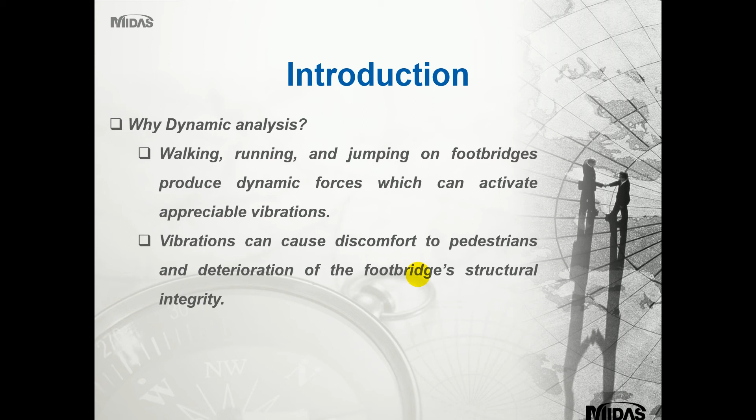So we're just going to look at the basis for dynamic analysis. From Newton's second law of motion, this time varying force equilibrium equation is derived, which is the fundamental theory behind dynamic analysis. Unlike static analysis, which is dependent on one parameter called stiffness, dynamic analysis involves a time varying force and consideration of three structural parameters: the structural mass, marked as M, the structural damping, C, and the stiffness, K. F is the time varying external force applied on the structure, and X(t) is the time varying displacement, as you can see from the equation. So the mass and stiffness are parameters which we are well aware of.

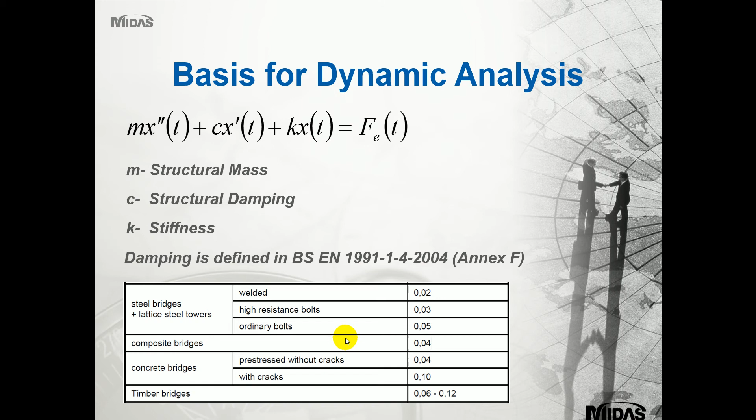The structural dampening effects and the amplification of the vibrations are also known. The Eurocode recommends some values of dampening coefficient for different types of bridges, which are represented in the table on the screen. Today we will deal with a composite steel girder footbridge, which we've got as 0.04 for the dampening effect.

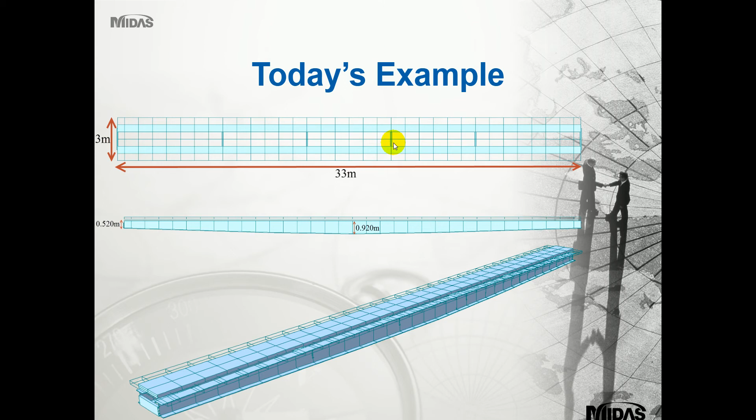So this is today's example. We are focused on a composite steel I-girder bridge for pedestrian live load only. The span of the bridge is 33 meters long, it is a simply supported single span, and the number of main girders is 2, spanning all the way across, with the cross members numbering 6. Just to represent those there, show you quickly.

Apply time forcing functions along the length of the bridge, maintaining constant pedestrian velocity. So the Eurocode load models are applied on the bridge with the code-specific constant velocity. That is for that section there.

The final step is to check for acceleration time response to determine the peak acceleration at any point on the bridge. The dynamic analysis in the software gives us the peak acceleration on the bridge, which can be compared with the code limit for comfort criteria.

Just to go over where the code comes from, the analysis will be done as per EN 1991-2, 2003 UK National Annex 2.44, which calls for 2 distinct analyses. We'll just go through those: determination of vertical deck acceleration, and a check for large synchronized lateral response.

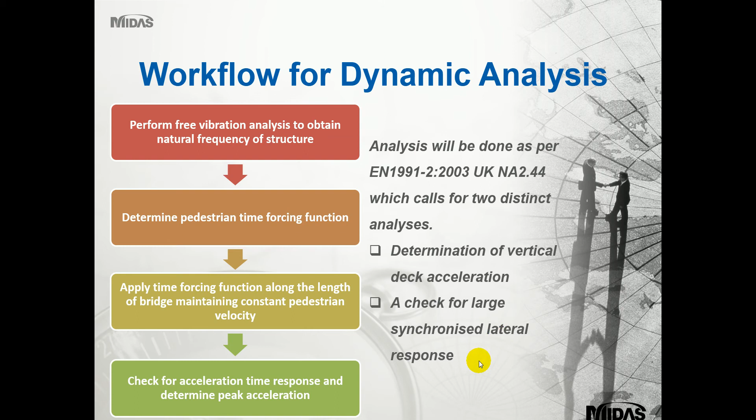This frequency is a function of just mass and stiffness of the bridge. This gives us an idea of how the bridge vibrates on its own and which vibration mode can be the worst for the bridge itself.

The Eurocode gives a verification criteria that should be followed after the analysis. A verification of the comfort criteria should be performed if the fundamental frequency of the deck is less than 5 Hz for the vertical vibration, which is in the Z direction, as we'll demonstrate during the use of the software for the vibration analysis. It's 2.5 Hz for horizontal, lateral, or torsional vibration, which is in the X or Y direction.

Now we're just going to go into the software. Just to drag the model across. So we have the Midas Civil working space.

First of all, I just want to tell you that we're not actually going to be modelling the composite bridge from scratch here, because we've already done that in a previous webinar. If you do want the recording for that previous webinar so you can model the composite bridge, then please do send us an email or give us a call and we'll send you the links. It's all on YouTube on our Midas UK page, so just to let you know that.

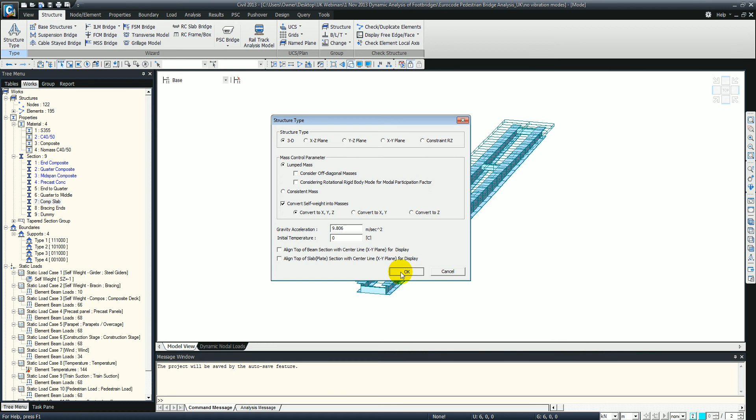But I'm just going to start this now and go straight into showing you defining the mass and converting the self-weight to mass, and also the other dead loads as well, using the structure type straight away.

When we convert the loads to masses, just go down to load to masses and do exactly the same thing. We could add different ones - for the precast, the parapets and the bridge deck, everything like that, and for all the services as well. So they've all been added to the structure.

So we've got to make sure we convert all the loads to masses, and the stiffness is taken into consideration because of the materials and also the sections, which are already defined.

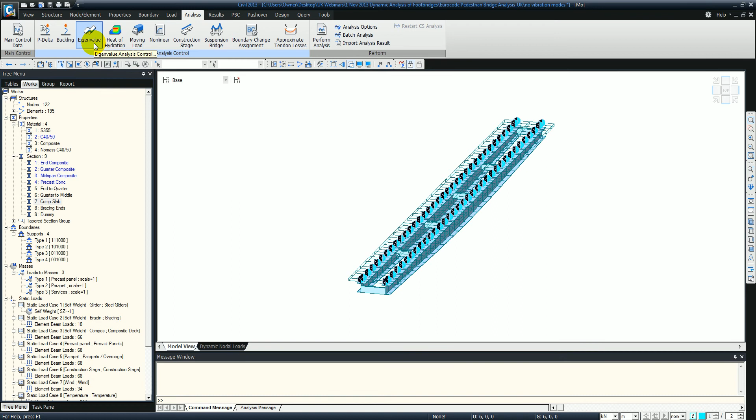So I'm just going to show you the free vibration analysis. Now we can change the number of frequencies, so we can change that to 5.

So now we've just completed all of this section. We're just going to bring the post-processing module over, where the analysis has already been carried out, since we didn't want to waste time on the analysis.

Now let's go through the mode shapes and the vibration mode shapes. We've got different modes, so obviously you've got 1 to 5 there, and we can put a legend on it, look at the contours, and we can even do an animation.

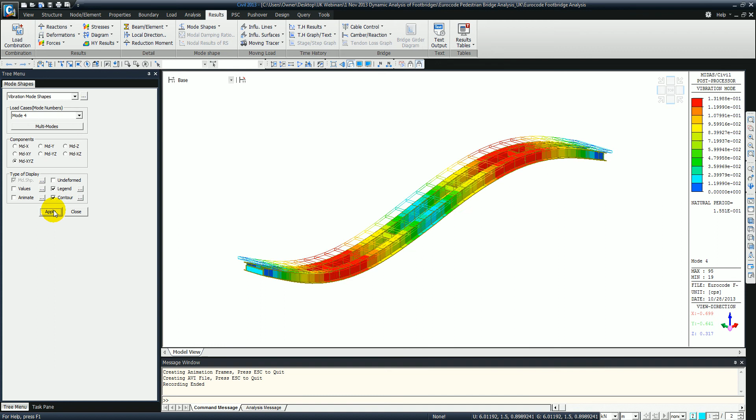So there's mode shape 1, showing it heaving, and here's mode shape 4. It's a completely different mode. We're just going to show you an animation now, and then we'll show you some of the tables as well. So that's an animation, that is one complete motion.

I'm just going to show you the table as well, just to show you how this actually compares up. Right, here we have all of them, so just to show you some of the columns. Now this is the cycles per second, so for every single second it will do 1.7 cycles, which is what I showed you before, so it iterates up and down 1.7 times.

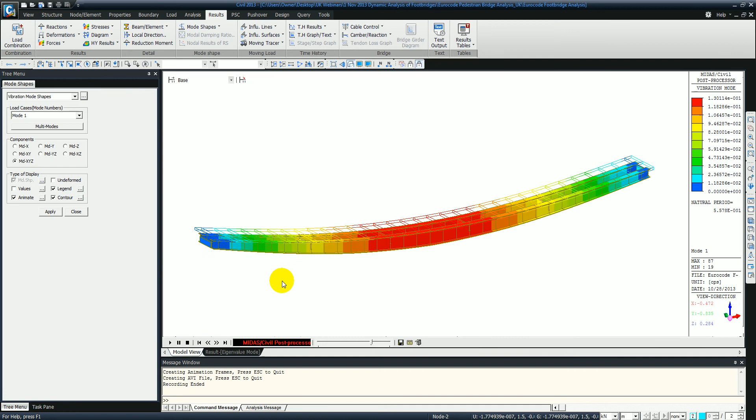So just to show you, this is one complete motion all the way to the very top. Let me press play again to find it. So all the way up to the top, then all the way back down, then back to the middle, and that is one complete cycle. It will do that 1.7 times every second. So let's just explain that for you.

So here we have the motion in different directions. You have the sum of the mass in the first mode, which is the movement, so anything over 90%. This shows what percentage of mass is participating by a given mode of vibration, and the mode with the highest mass participation is the critical mode of vibration. As you can see, for mode 1, which is over 90%, or 92.1% in the trans Z direction, or the Z direction, which we'll demonstrate in the model now.

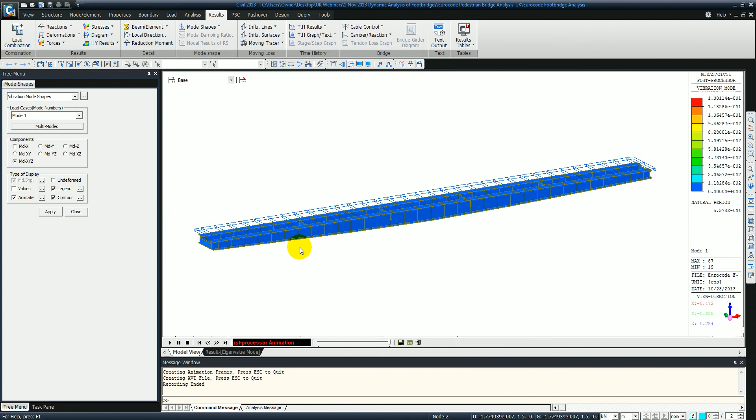So as you can see, this mode we've seen it previously, we just want to see it again. As you can see, it's actually heaving in the Z direction.

I just want to show you by taking it back to the table, and I just highlight in the Y direction, so you can see it's 77.2%. It's cumulative, so it actually adds it up with each iteration. So we see that the cumulative mode 1, 2 and 3 will eventually be over 90% if you add all the modes up in the Y direction. Just to show you the mode view in the Y direction for mode shape 3 - here's mode shape 3, as you can see, it's actually bending in the Y direction, it's actually twisting in the Y direction.

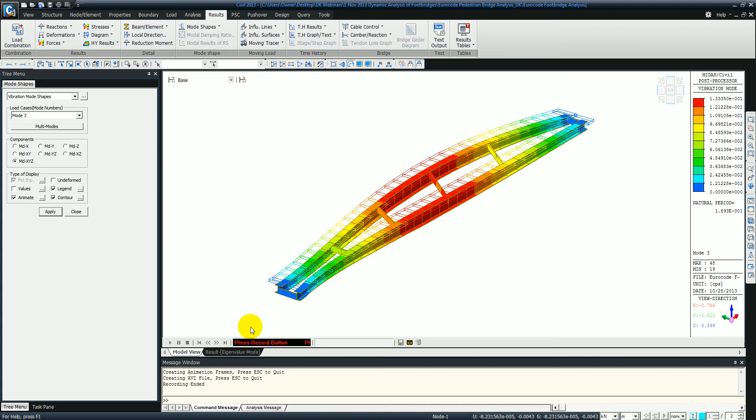So now you must be wondering why I've only decided upon 5 modes instead of say 6, 10 or even 15. This is because the code says that the total number of modes to be considered for vibration analysis is based on the sum total of the mass participation of all the modes, which is what I explained when you add them all up as you go along. So it should be no less than 90%, essentially. That's all you'll need to go up to.

So you can see from the table that 5 modes here are significant, sufficient to give 90% participation of mass in the Y and also in the Z direction. That's another key factor for both the Y and the Z. The mode with the highest mass participation is the critical mode, which is the first mode, is the most critical from the vertical vibration, i.e. 1.79 Hz. So as per the Eurocode, we need to check for dynamic analysis.

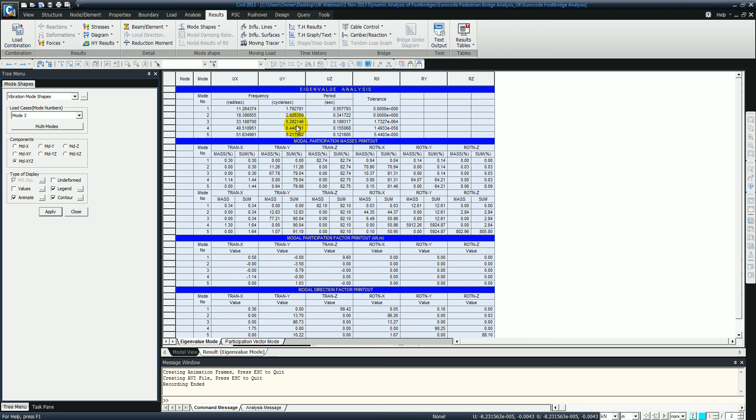So I'm just going to go back into the presentation, just load that up quickly now, so take you on to some animations. So that's the first mode, just showing you there, which is for the vibration natural frequency for vertical vibration is 1.79 Hz.

So a check is required. So the second mode of vibration natural frequency for lateral vibration, which is 2.93 Hz, the check will not be required.

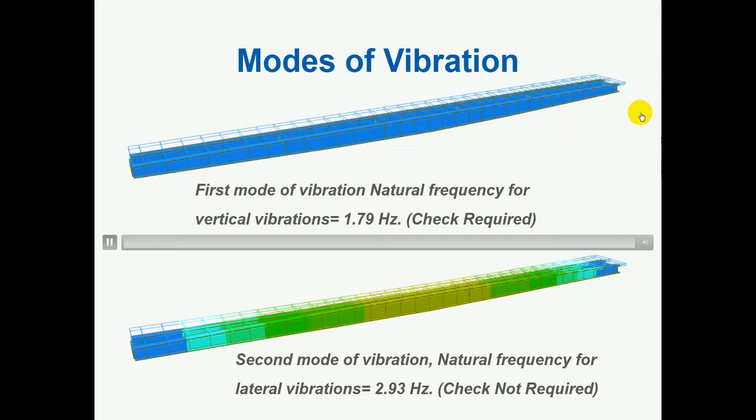So after doing the free vibration analysis, which we just carried out, we will see how to apply external dynamic loads onto the bridge. To consider external force effects, we need to select a number of modes of vibration for the analysis. These modes should have a combined mass participation of at least 90%, which is what we covered previously. So if it does not meet the 90% criteria, we have to run the free vibration analysis for more modes.

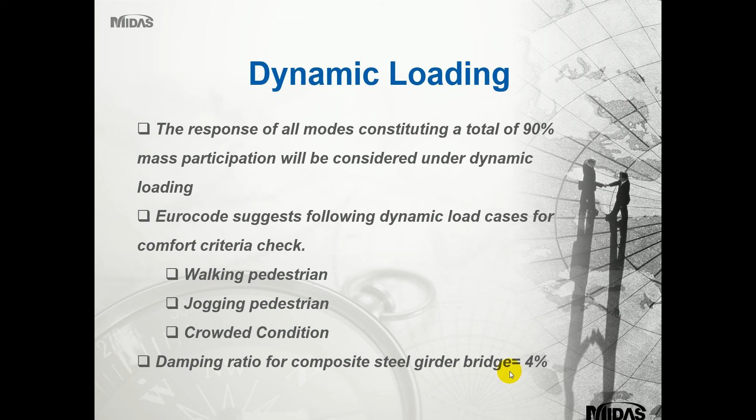So the Eurocode suggests following dynamic load cases for a comfort criteria check: the walking pedestrian, jogging pedestrian, and also the crowding conditions have to be considered, including the damping ratio for the composite steel girder bridge, which is set at 4%, which we showed you briefly at the start.

So for the dynamic models for pedestrian action, the first step is deciding the load model, which is selected for the class of the bridge, which has been nicely classified by Eurocode based on the type of usage of the bridge. Based on this class, Eurocode tells us what pedestrian densities should be considered in our loading. We will consider class B in today's example. So as you can see, n equals 4 for the group size and walking, and also the jogging is n1. Then we could also consider the crowd density, which is 0.4.

So just going past that point to focus on the bridge uses. We're talking about suburban locations likely to experience slight variations in pedestrian loading intensity on an occasional basis, so it might have crowd loading in a once in a blue moon kind of scenario.

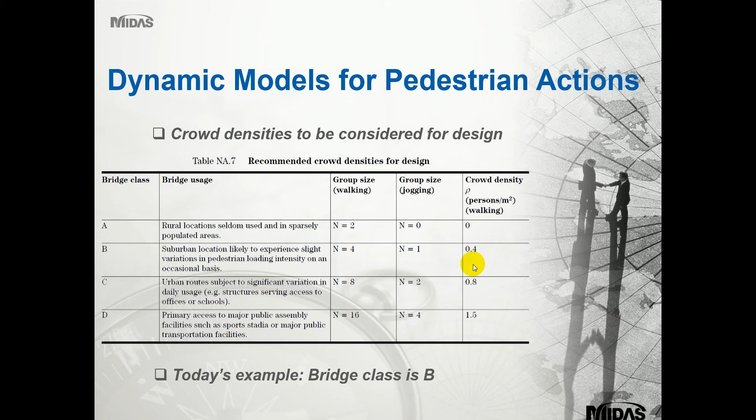So just going on to the next slide, talking about the walking and jogging actions. This equation is given by Eurocode for engineers to calculate the dynamic force to be applied on the bridge. The objective is to apply the worst case loading, and for that we need to get a resonance condition on the bridge, i.e. the frequency of the loading should equal the frequency of the free vibration on the bridge itself. We will obtain highly amplified acceleration vibration of the bridge, where the frequencies coincide and magnify the actual amplitude of the vibration itself.

So now we'll take you through the different parameters of this equation in the Eurocode. This code, as you can see in the table below, specifies unique walking and jogging velocities which need to be maintained during the analysis. As you can see from the table, the reference load, F0 or N, for walking is 280, and for jogging it's 910.

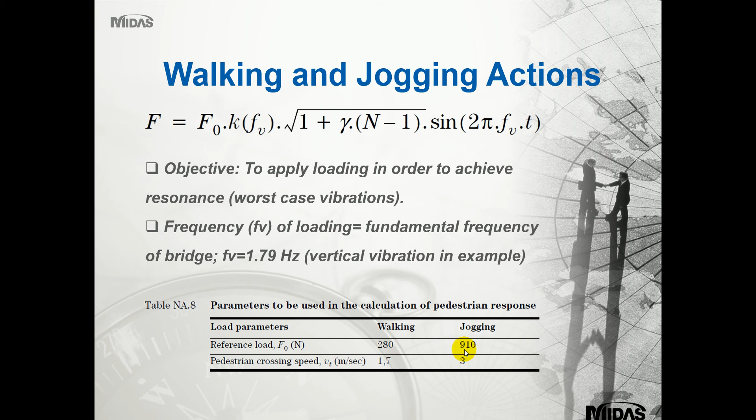So just to focus on the walking and jogging actions in a different equation here. The K factor is an extra factor applied to make this equation meet realistic population situations. This involves pedestrian sensitivities to vibration and harmonic responses.

As you can see from the curve, A is the walking, which is the solid line going throughout, and B is the jogging running, which is the dotted line. The x-axis is the frequency, and the y-axis is the combined population K factor.

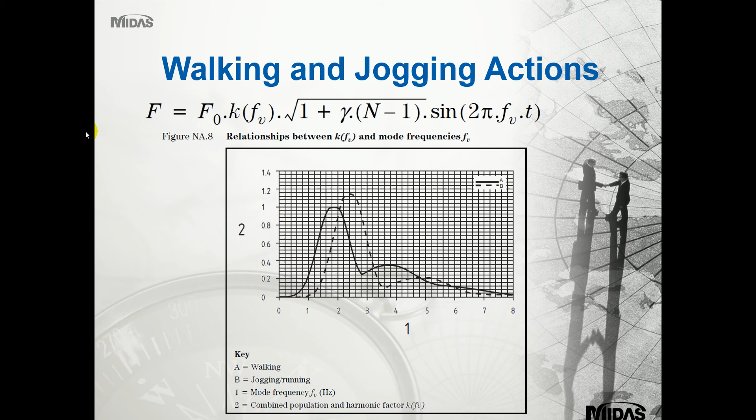So just going to go into the software and show the time history, load case, and the time functions. Now I'm just going to drag the software over from my other window across.

So I'm just going to focus on the time history load cases. I'm going to go up to load and load cases, then we just want to add a new one. I'm just going to add the load case, give it a name, which is walking, and just do the linear analysis, and also the modal as well for the analysis method.

And then we're just going to change the end time, which is 20 seconds. This is the length of time it takes to go from one end of the bridge to the other. The bridge is 33 meters long, the pace or iteration is 1.7 meters per second, so it's going to take about 20 seconds to get from one end of the bridge to the other. Basically, I think it's actually 18 point something seconds, but we're just going to stick 20 in for now.

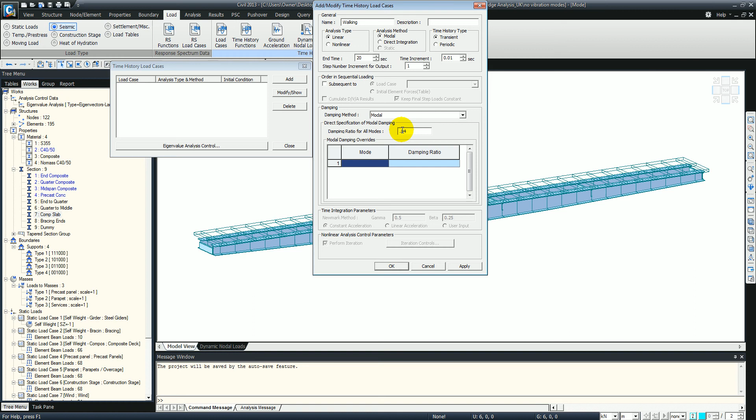So it's going to change the dampening ratio, which we discussed earlier, which is 0.04 or 4%. And we just click OK. So now we continue, and similarly to this, you can create cases for jogging and also crowd loading. We're just going to stick with the walking in this scenario, but really for jogging and crowd loading, you just increase the amplification.

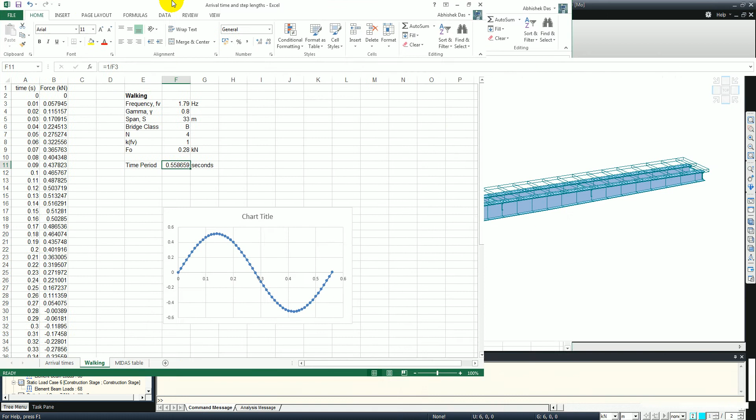So I'm just going to pull up my Excel sheet and show you actually the functions worked out. As you see there, per seconds of time, the force changes. This is the exact calculation that we had on the spreadsheet. As you can see, there's the force being produced as the time increases as well, and this is the forcing function going across there, the graph.

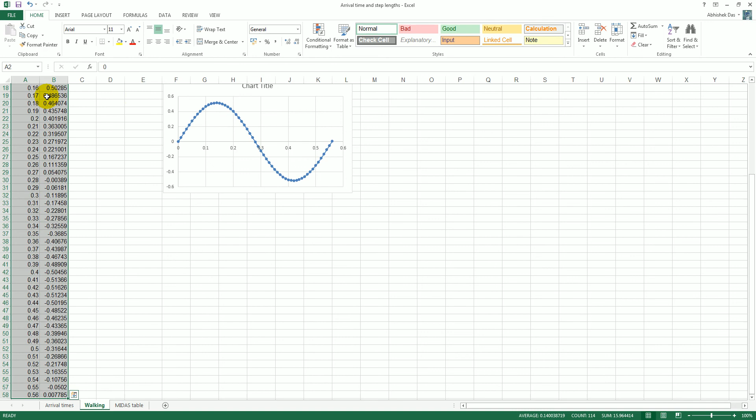So this one cycle takes 0.55 seconds, apologies there. So that's one iteration, and there's the time and also the force. Now what we can do, we can copy and paste this, select all and just copy and paste this straight into Midas. We'll create a separate worksheet.

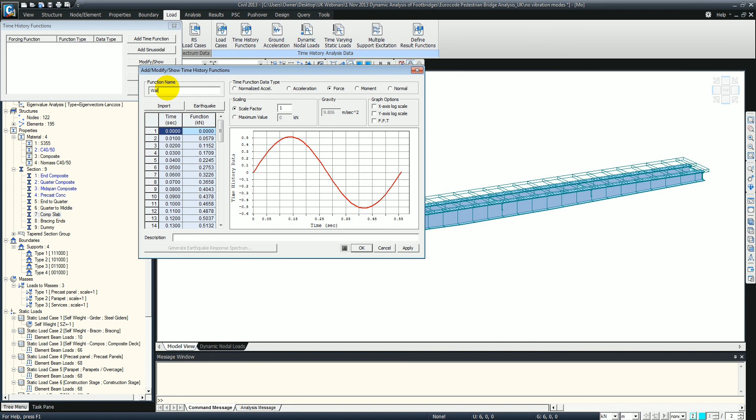So to show you the table now, we just go find it. Time history force function, just want to add it. You see there, we want to change it to a force instead of the acceleration. Then we can copy and paste the time and the function in there, and it also gives you your graphical representation. So we just call it walking. Click OK, just close that.

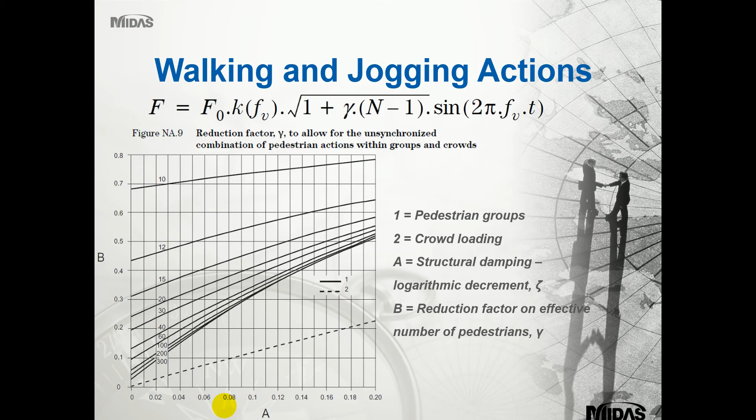So I'm just going to go back into the presentation now we've discussed that. We're just going to go through how to apply these actions.

The load application points have to be decided and marked on the bridge, so we put the nodal points where the pedestrian is most expected to step onto the bridge. The spacing of the points is such that the constant velocity of the pedestrian, as suggested by the code, is maintained on the bridge, making sure the bridge is split into equal sections. This is done using simple multiplication of velocity and the time period of one step of the pedestrian.

The dynamic force from the previous slides should be applied on these marked nodes, and they should be applied at different time intervals, marking the acceleration of the person going across the bridge.

I've already calculated these in an Excel sheet, showing the intervals going across the bridge. Here you can see the different nodal points, the number of seconds it takes to get across the bridge from one side to the other - the arrival time - and also the scale factors, which are -1.

Now I'm just going to bring over the model, and we're going to apply these loads into the table form. We look at the dynamic nodal loads, and we have to create them first and foremost.

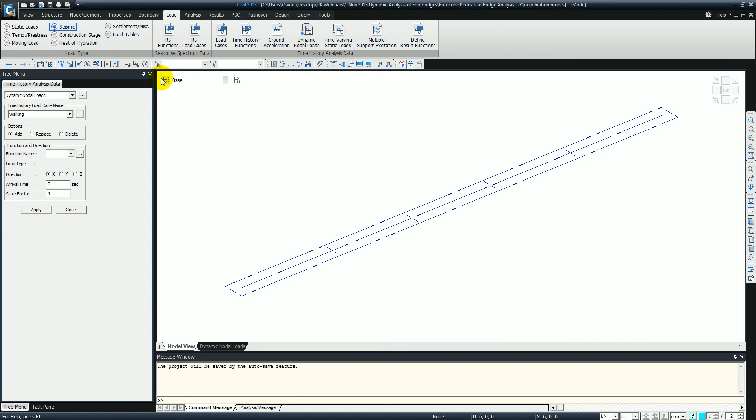We're just going to select the node at the first point, highlight everything, and create a function for the dynamic nodal load. There's one function that's been created, or it's already existing, and we're going to use that function, putting it in the Z direction with the scale factor of -1, which we had earlier.

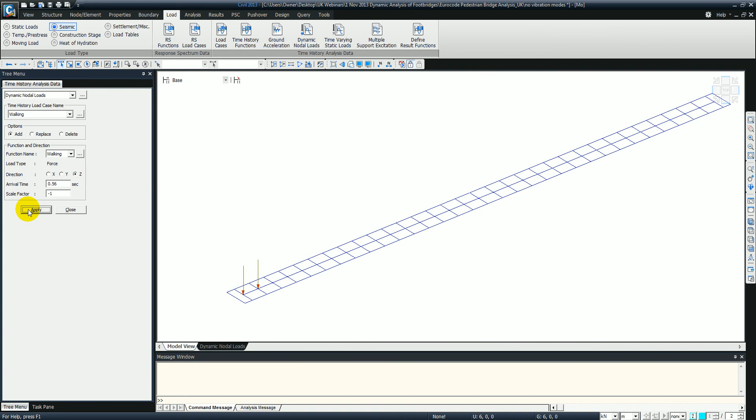I'm going to demonstrate this one more time, and then we'll use copy and paste to bring it in. We put in the number of seconds of the arrival time, then highlight the second node, which tells us how long it takes to get from one node to the other - 0.56 seconds. Now we can pull up the table and copy and paste our Excel sheet into this table.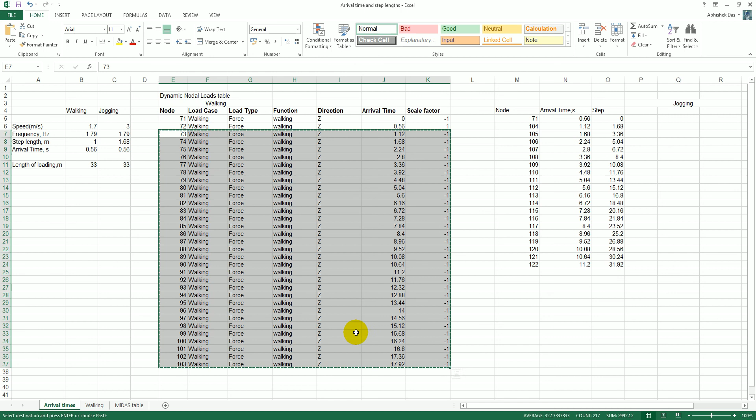I just want to select from the two at the top down, since we've already got those in there, and copy and paste those in. Now you can see the dynamic loads are already applied, going across the structure.

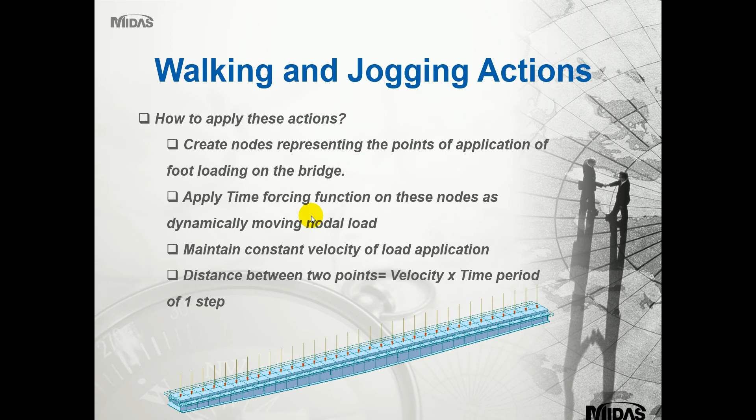Now we're just going to go back into the presentation and move on to the next section, focusing on the crowded conditions. Obviously these are slightly different - this is the crowd load model defined by the Eurocode.

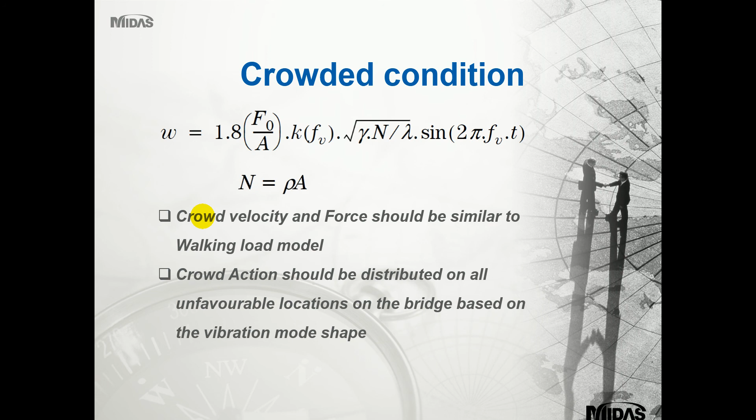The velocity should be the same as the walking velocity, and the crowd loading should be applied at the same time on the entire bridge. The direction of the force should be decided based on the most critical vibration mode shape.

So here we have the pedestrian vibration. We just run the analysis to see the vibration results, and these are the vibration results on the bridge structure.

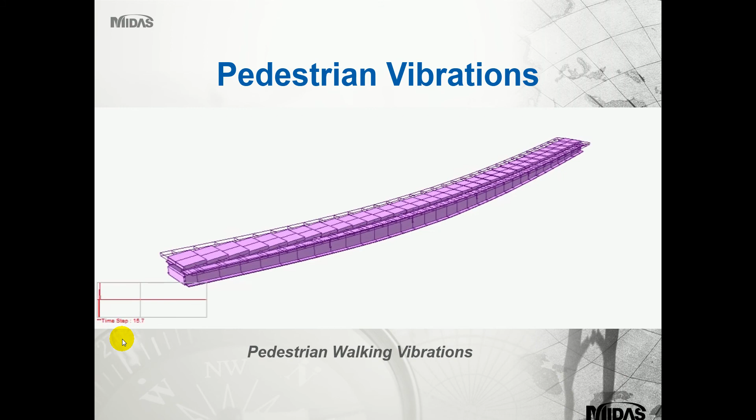The time history results for displacement are shown for each time step, and also the maximum and minimum displacement and acceleration results from the different load cases, which I'll show you now.

Now I'm going to take you back into the model view. There we go, we just look at the model view, and I'll look at some of the minimum and maximum displacements first of all.

So different - we can select the max for the walking, and we can select some of the different values. We just want to look at the acceleration and click apply.

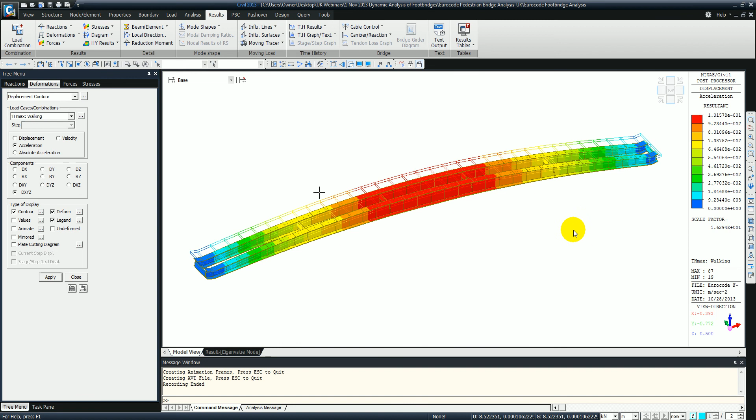Here we find the maximum, which is at node 87. We can highlight that node for you now, putting it in the node box. You've got the node box, and then the element box just next to it, and that node is in the middle, which is the maximum acceleration.

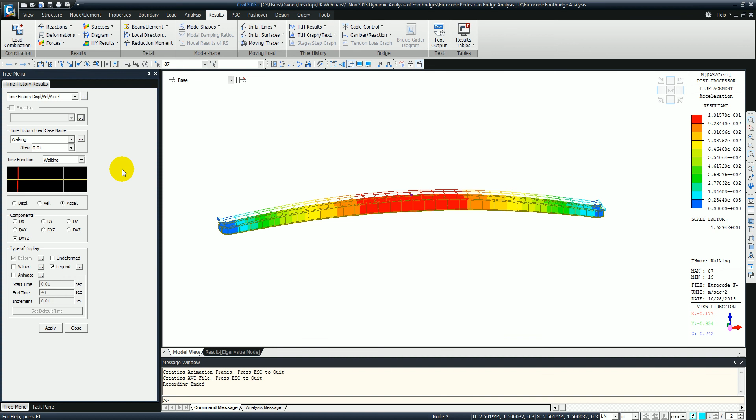Now we look at the time history results graph and look at the displacements, and we can do this based on time. We can click anywhere on this representation here, and it will tell us the exact displacement going through all of the different time steps across the bridge, and you can see the different steps just above the graph, telling you exactly where it is.

Now that we've seen the displacement and acceleration, you're probably wondering what we're going to do with it. What we really need to do is check the comfort criteria of the bridge. I'm just going to take you back into the presentation and show you that now.

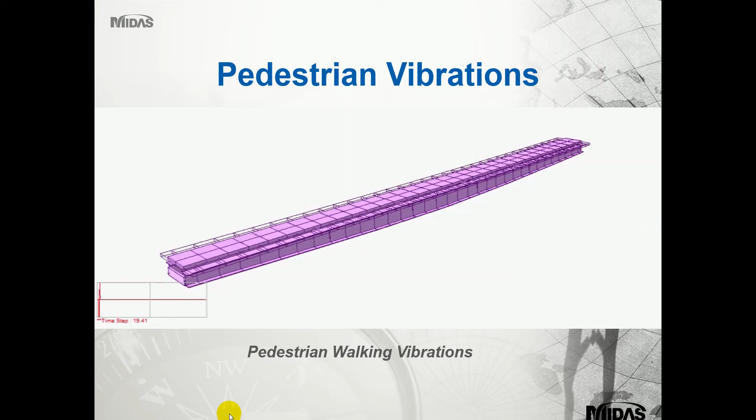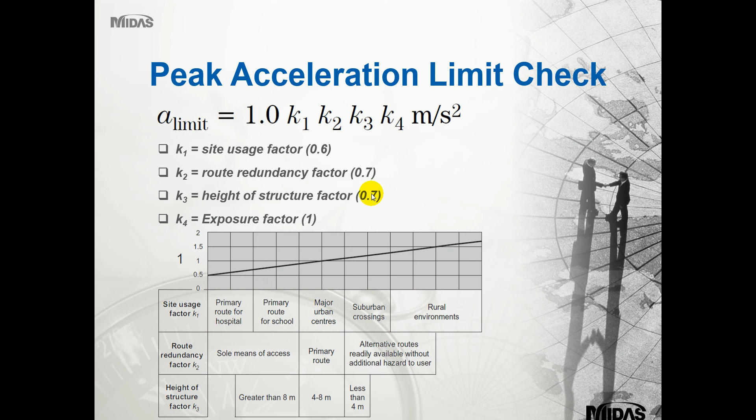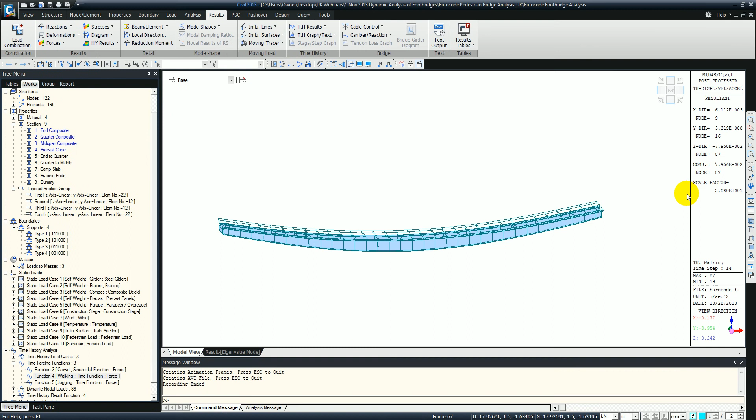The check's okay. So I'm just going to go back into the software and show you how we create this type of plot. Let's bring that across. So just look at the time history results and the graphs. So we just got to define that.

So we look at the different cases. We want it just for walking, we just want to modify it. So we select the node number that we want, which is 6, which we've defined as being the worst case, right in the middle. And there we go, we can just identify that. You can see a little purple dot right in the middle, and we want it in the DZ direction, and we want it for walking as well.

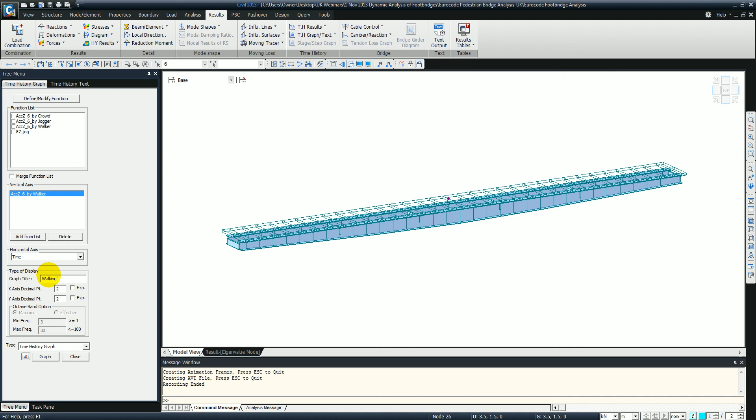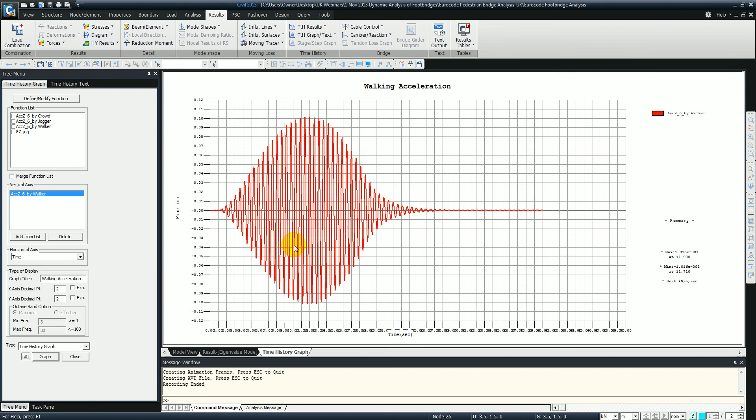Selected one of the load cases, so just the walker, which is the vertical axis, and also the horizontal axis, which is time. So this is what our graph's going to look like. We just got to change the decimal points to make sure we can fit it all on the graph. I just want to give the graph a title as well. So there you go, that gives us our graphical representation of the function versus time, and also our peak function, which is at 0.10, which we highlighted in the table previously on the previous graph at the bottom.

So just talking about vibration control. Now that we know from all of our analysis that our bridge is actually passing, but for vibration control, these are some of the steps you can take.

So you can increase the stiffness of the bridge. Increasing the stiffness is best applied to bridges when the pedestrian vibrations are judged to border between acceptable and unacceptable. So the bridge structure could be stiffened in the appropriate direction, or the effective span can be reduced, basically shortening the span of the actual structure. Significant design modifications may be required for this though.

We can increase the mass. Increasing the mass of the footbridge will reduce the influence of human induced vibration, obviously adding to the weight of the structure. A proportional increase in stiffness is required to maintain the natural frequency, and significant design modifications may be required to carry this out, so you'll be effectively adding a lot of ballast to the actual structure itself.

One of the most commonly used is the dampening system. The dampening system increases the amount of energy that is dissipated by the structure. Mass dampeners can be tuned to specific frequencies, and viscoelastic dampeners can be added to cover a wider range of frequencies and motions. Dampening systems can be retrofitted to a footbridge after completion, so if it was a case like the Millennium Bridge where the vibration caused was far too much, you can induce the dampening effect and add those to the structure like they did.

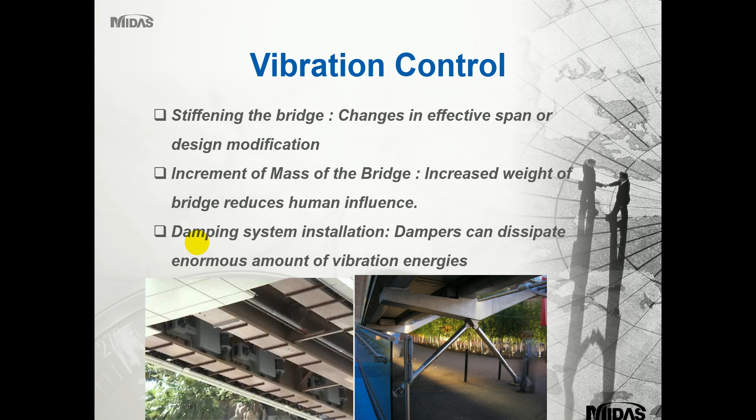Allowing for future installation of these devices in the overall design of long span footbridges is worth considering in some cases, especially in view of the difficulty in predicting the inherent dampening of these structures, making sure a full analysis is carried out. So we come to the end. I'm just going to close there. We haven't got too far over the time, but I'm going to call it a day on that one.